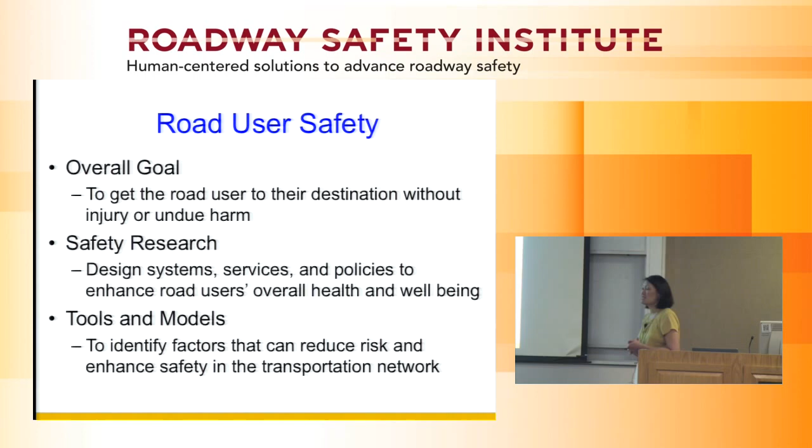To begin with, when I look at safety, I look at it from the road user perspective. My goal is to get the road user to their destination without any injury or undue harm. To do that, I basically look at designing systems, services, and policies that can help enhance the road user's overall health and well-being, using various tools and models to identify factors that can help reduce the risk and enhance the safety of everyone that uses the transportation network.

Primarily focusing on the behavior of the driver themselves, my goal is to make sure that we design systems that can actually take into account what's going on with the user. When we have these new systems coming on the road, and I talked a little bit about that yesterday, we're looking at systems that actually have the capability now to adapt to the user as the user is trying to adapt to it.

There's a lot of things that can actually come into play when we do that, which is the roadway, the topography, as well as the geography from the infrastructure perspective. But from the user side, there is how much experience we have with a particular road, as well as how much familiarity. So we need to basically account for what these individual driver differences are.

There are many things that are associated with the driver, including medical and cognitive impairments. We look at things like the onset of sleep apnea or the onset of dementia, things associated with older and younger drivers. There could be things related to fatigue, distraction, inattention, and generally this propensity to take risks that many of us think about.

Every time we get to an intersection or use a particular road, we actually weigh the risks about using certain aspects of it, whether or not we should stop, whether or not we should text while we're driving, whether or not we should proceed through any particular intersection. So when we're considering these systems and accounting for these individual differences, we also have to adjust for the fact that we're maybe driving a vehicle that has different types of devices, the traffic devices themselves, as well as the environment.

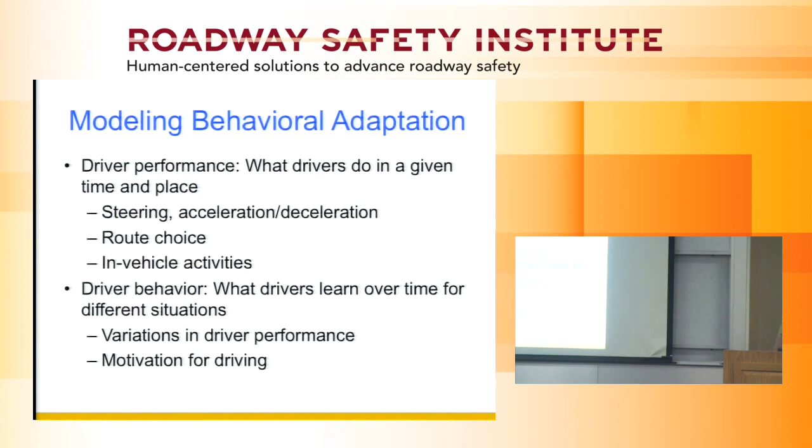So when we look at behavior adaptation, there's two kinds of aspects. There's the way a driver actually performs for a particular time and place, including how they steer, accelerate, decelerate, brake, park, what route choices they use, and what in-vehicle activities they do at a particular time. However, when we're looking at a pattern of behavior, we need to look at that over time.

We need to look at, are they going to be driving, let's say, 65 miles per hour on average on this particular roadway? Will they drive 65 miles per hour tomorrow, the next day, or the day after? So we're looking at these variations in driving performance and trying to understand how those variations and their motivations for driving can impact how they use these different systems.

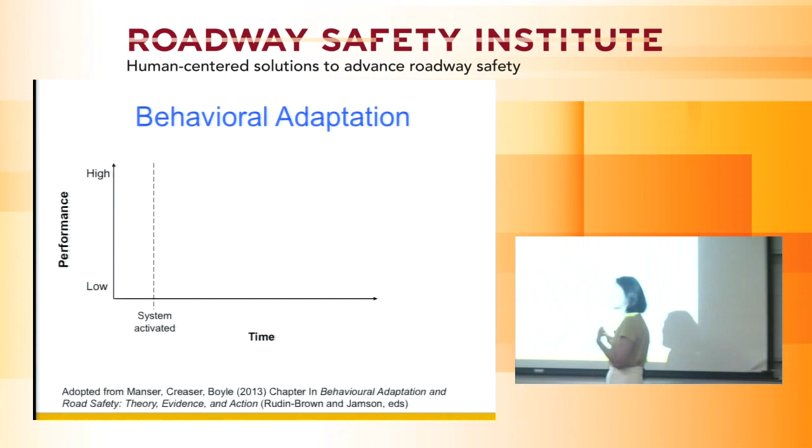So there was a model I worked on with a couple people here at the University of Minnesota a few years ago, Mike Manser and Janet Creaser, where we looked at how people actually change their behavior based on system use. The first thing is when you get a system in your car, it gets activated. Once that happens, we assume that if it's a safety system, your performance will actually increase based on that system. Let's say ABS, conventional cruise control—you expect your performance will get better.

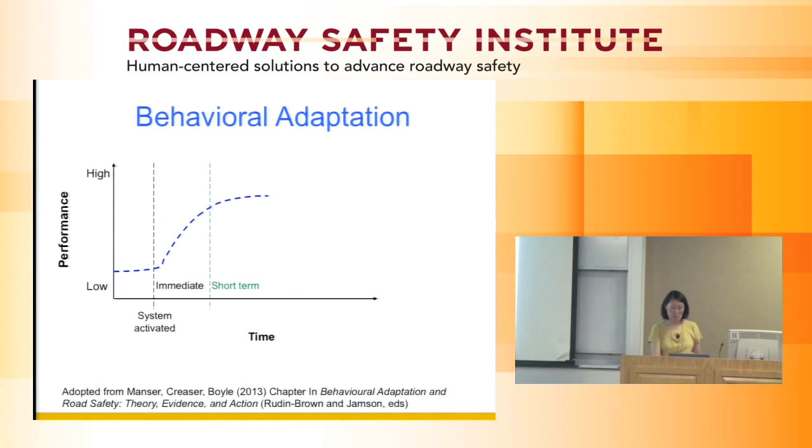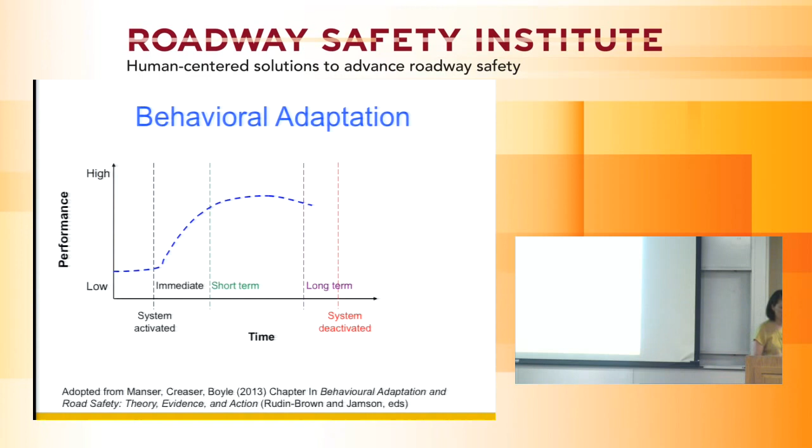Now, in the short term, you might even keep trying to improve and get even better. But over the long term, there's only so much you can do, and so you level off. If anything, you may not be able to perform at some maximum level, so it starts to go down a little bit. And if the system gets deactivated for any reason—whether you're using a different car or the system isn't working as expected so you turn it off—your performance might actually go down.

But the goal is the safety system is doing what we expect it to do. We actually hope to have some sort of positive transfer—in other words, what we learned from using that system will remain with us, such that our performance will hopefully be better than it was before, even when that system is no longer there.

However, the more likely case is that when that system is gone, I'm just going to go back to what my performance was and drive the way I normally do. Now, alternatively, the flip side is I got so used to that system that I was expecting it to do a whole bunch of stuff for me, so that when the system is no longer there, I become less aware, less knowledgeable about what to do in a particular situation. In that case, I might actually have a negative transfer.

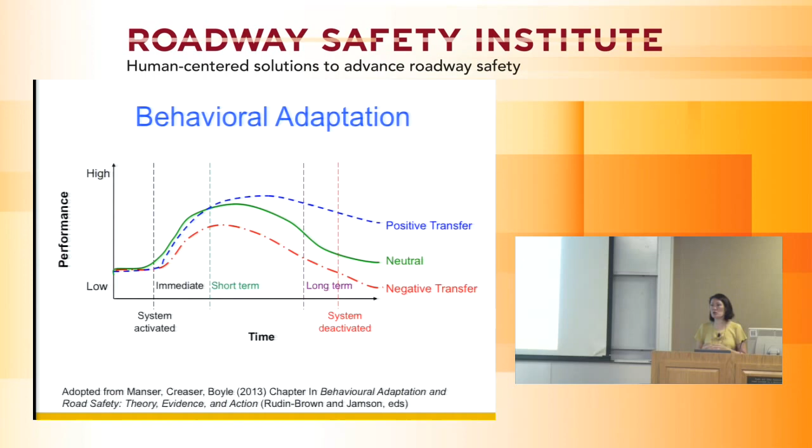So these are the three different possible scenarios, and there are different continuums in terms of how people adapt to different technologies. Now, when we look at that, there are different ways we can actually quantify that behavior. If we're trying to model how people behave in different situations, we can start by looking at their immediate response to a particular system. By doing that, we're looking at what their actual risks are as they're using that system in a particular environment, given whatever the risks are at that moment in time.

So how would you do that? We can actually use things like naturalistic data. We can look at the crashes that have occurred in the past and try to take a look at what's going on. Maybe the crashes only tell us one part, but we can look at those crashes in addition to moving violations—in other words, we can look at just observationally what has been going on with that particular driver.

So if we want to use naturalistic data—in other words, setting up a video system in a person's car or just observing them through whatever means—we can do that in different ways, but the value is that we can capture what these driver-initiated activities are. Why is it that they might use a system one way for one scenario but not in another? So it can provide insights into driver behavior for different types of environments and help us identify the context associated with those safety-critical events.

Now, of course, the challenge is it's hard to always see what these interactions are with new systems, because oftentimes it's not actually to the same degree. But we can maybe have more focused studies looking at these things.

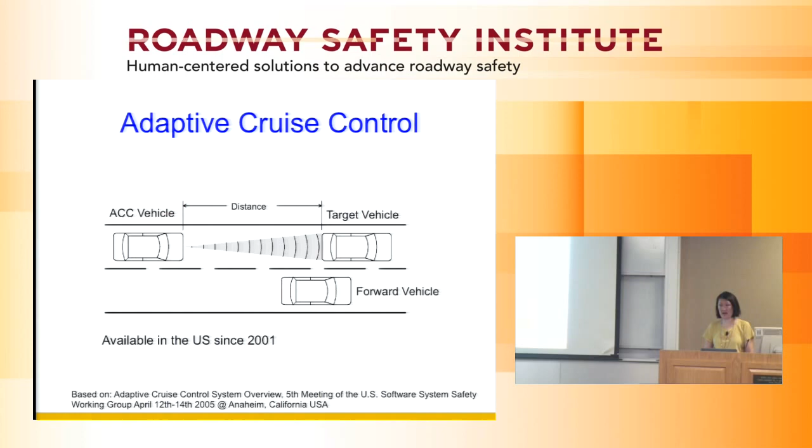This system has actually been around since 2001, so a lot of people have it in their car and may not be aware of it. There was a field operational test done at the University of Michigan Transportation Research Institute on intelligent cruise control, which was a precursor to adaptive cruise control. It was designed to work exactly the same way. This was done in 2003 to 2004.

What was really nice about the study is that they had 60-some odd vehicles, and all of these people had never used adaptive cruise control before, so we could see what their novice behavior is. We were able to look at these drivers in real-world situations using adaptive cruise control, and we examined their trajectory as they closed in on a lead vehicle.

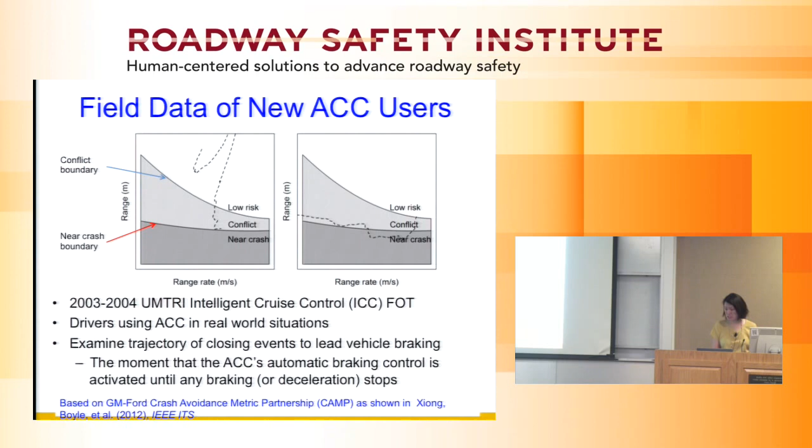However, what you might see a little bit differently is what happens next, which is that the driver may respond a little bit differently. In a conflict event, they respond much quicker. But in a near crash event, you can see that the lead vehicle starts slowing down a lot more, so they get closer and closer to the test vehicle, but the driver actually took longer to respond. So in near crash events, which are much more safety critical, it may take longer for the driver to respond, and if the ACC does not intervene appropriately, you could have a very serious situation.

As a matter of fact, when we looked at the response time to these conflict events for these different scenarios, where there's a near crash where the ACC basically responds, and a near crash where the ACC responds and the driver intervenes, etc., we actually see these different types of patterns.

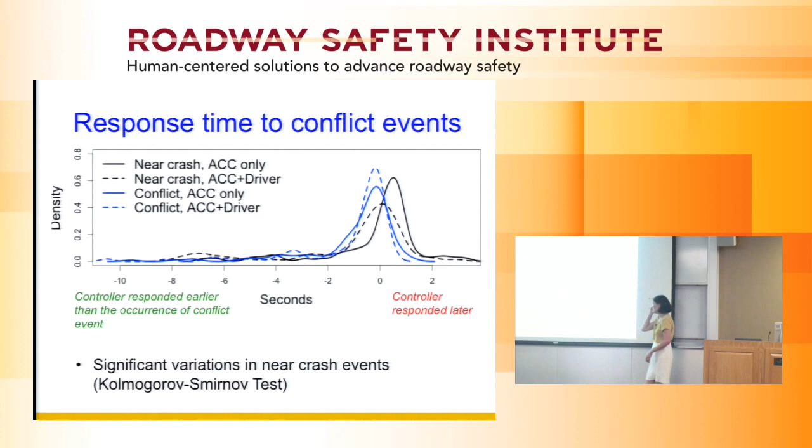So these are situations that we wanted to take a look at in greater detail. We used this data: there were 66 participants, equal numbers of males and females, and 3 age groups—younger, middle-aged, and older. And we set up a logit model with repeated measures because there are multiple observations per participant.

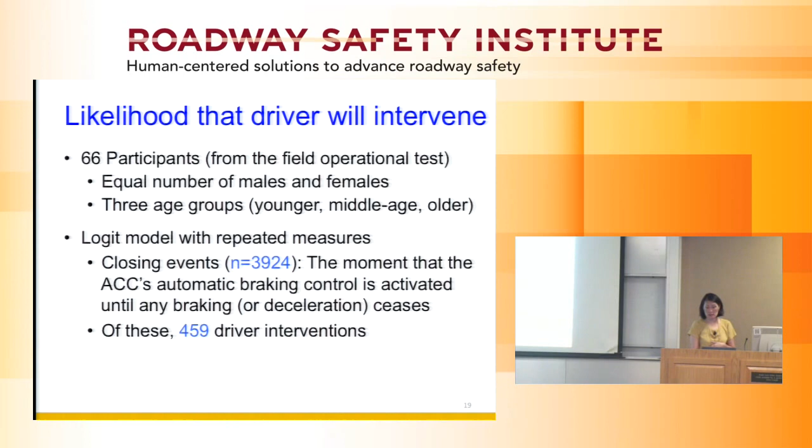There were almost 4,000 closing events, with 459 of them where the driver actually intervened—in other words, the driver took over for whatever reason. So we set up a logit model to take a look at what is the likelihood that the driver is going to intervene in this situation, given the fact that there is an adaptive cruise control system.

So after this model, the way to interpret this graph is that they're less likely to intervene if they're on the left side of one, and more likely to intervene on this side. So what this graph says is that on the highway, they're actually less likely to intervene. And that makes sense because on the highway they feel more comfortable with the car in front, and the ACC should be able to take over for most situations.

Whereas if they're younger, they're also less likely to intervene. If they're older or middle-aged, they're more likely to intervene. In other words, if you're an older or middle-aged individual compared to a younger driver, you're more likely to press on the brake and less likely to let ACC take over.

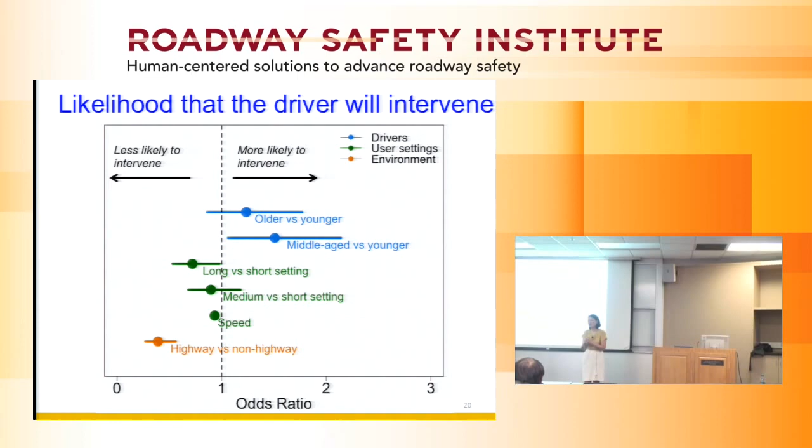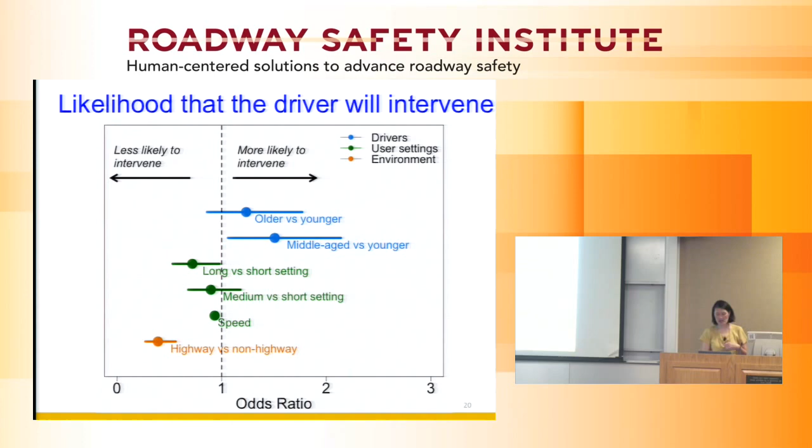And what these green dots are is how you set the gap setting. On this particular vehicle you can set it very close, somewhere in the middle, or a bit further away. So this is saying that if you set it on the very long setting, you're less likely to intervene—you feel more comfortable letting ACC intervene because you've allowed enough room for that to happen. It's interesting because you get this kind of information using naturalistic data, seeing what situations the driver is most likely to intervene in and what's going on.

But you can't really see exactly what the specific situations are or why these particular drivers are doing what they're doing. The challenge of naturalistic data is that we can parse out these differences, but there's lots of variation. Every single situation has some other scenario with different people, different vehicles, different road configurations, different weather conditions, and some of those measurements may not be as good.

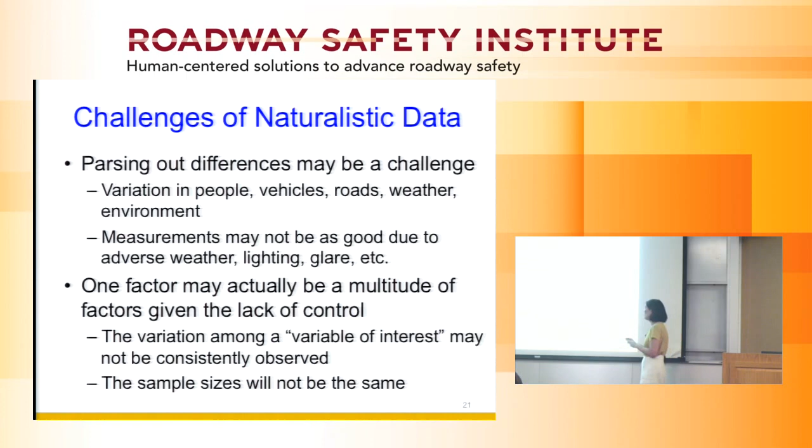This naturalistic data collection system was from 2003 to 2004, so some measurements may not be good due to adverse weather conditions, lighting, or glare. And even though we're looking at one factor in a naturalistic study, it could actually be a multitude of other factors. So the variation you see in some variable of interest may not be consistently observed, and of course the sample sizes are definitely not going to be the same.

So just to give an example, let's say I'm interested in the impact of driver distraction on crash risk. Well, driver distraction—if I wanted a code that said driver distraction yes or no—that's actually dependent on many different things. What is the type of distraction? The type of mobile device, if the distraction happens to be a mobile device. Where is the location of the device while I'm driving? Because that might have an impact, as well as how I'm interacting with the device and what are the circumstances associated with it.

So why this is important is because when you look at studies that come from naturalistic data and simulator studies, you might actually see different results. And one of the reasons why is because of how it is that you're looking at this data.

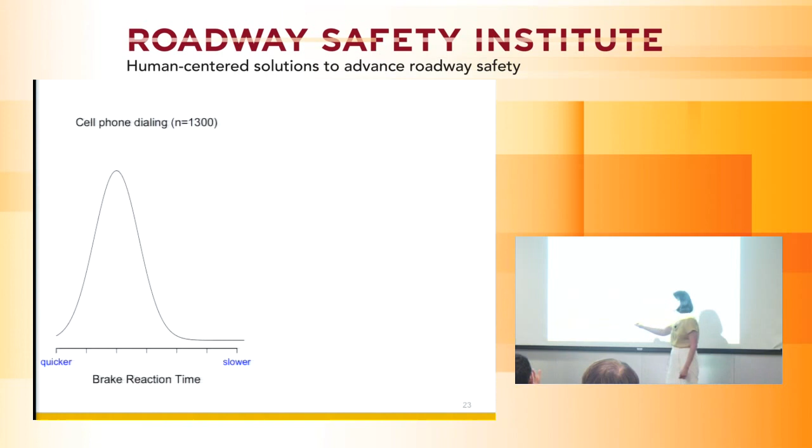For example, let's say I'm looking at cell phone dialing. If I do a naturalistic data study, I might actually see that the distribution is skewed more toward one side, which might suggest that you have quicker response time when using a cell phone. That's amazing, but at the same time, we do see some protective effects associated with cell phone use.

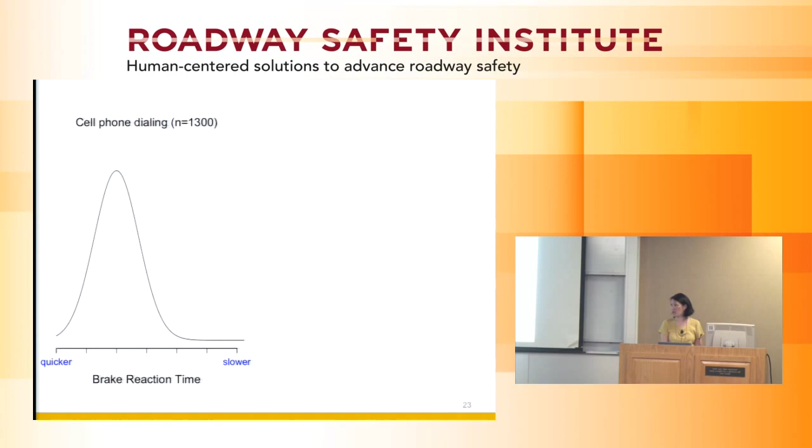But what if it is the case that cell phone dialing is associated with three different types of dialing? Let's say one is touch screen dialing, handheld voice dialing, and Bluetooth dialing. Because there are a lot of laws on the road about not being supposed to use handheld, you wouldn't really see that many observations of one compared to the other. So with Bluetooth dialing, which has 900 observations, that may actually skew the distribution more toward one side compared to the other.

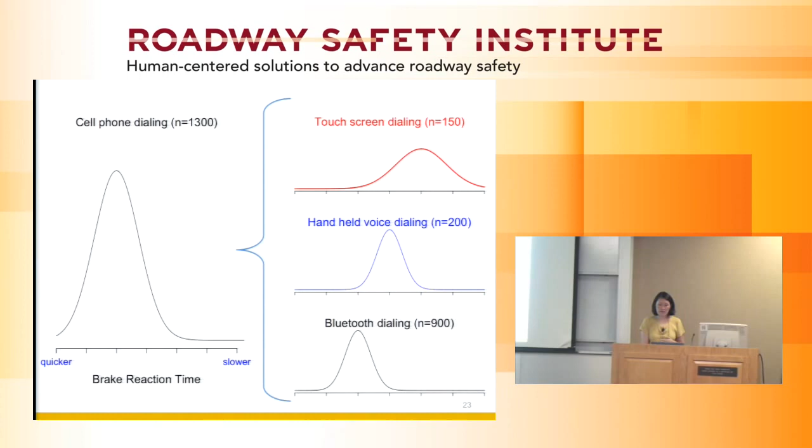If you were to look at these in more detail, let's say we look at touch screen dialing and Bluetooth dialing, where somebody might still have a flip phone where they're just pressing buttons, or they're using Bluetooth, we may see that for touchscreen dialing there were 75 participants in this category, and there was only like 1 to 3 observations. In other words, only half of the sample was unique.

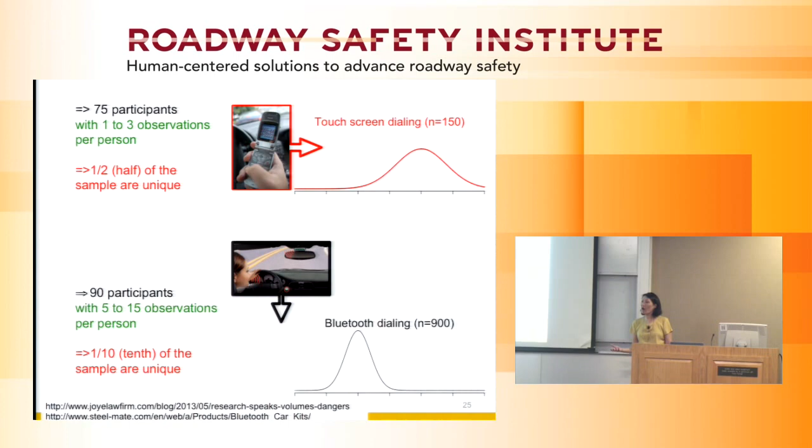However, in the Bluetooth category it may not be that much more — it was like 90 participants, and because they used Bluetooth quite often, there might be 5 to 15 observations associated with that. So only one tenth of the sample is actually unique.

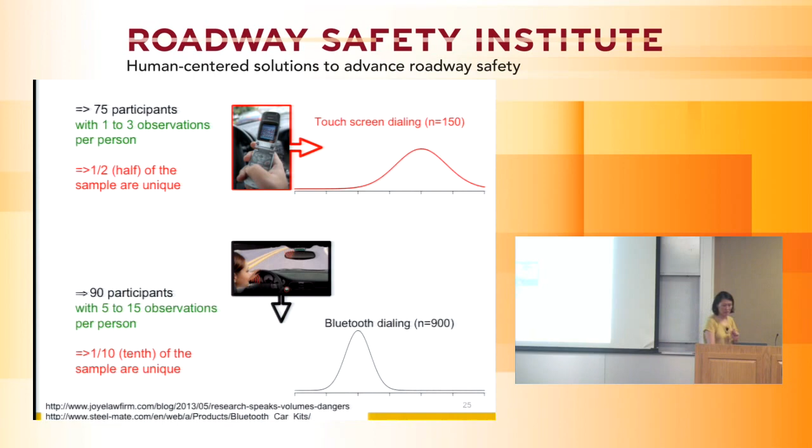So these are things that have to be taken into account when you're analyzing this type of data, and that's really important. So when we think about what repeated measures are, which is what we do when looking at some of these studies, going back to the logit model with repeated measures, we have to take into account how these observations and how the differences are actually correlated.

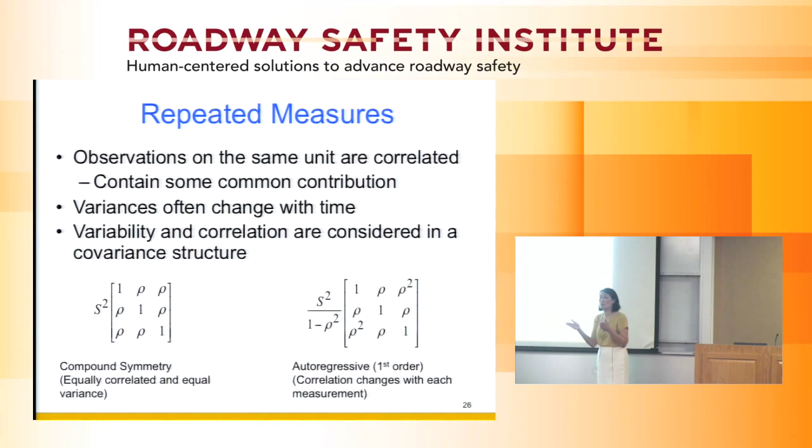There are going to be different types of variations associated with changes in time, and we have to consider what that covariance matrix is. I'm not expecting you to memorize this, and these aren't the only two types of covariance matrix, but my point is to show you that there are differences in how the relationship between different points in time are linked together, and that has to be somehow accounted for when you're doing your analysis.

The other thing that's important to recognize is that when you're looking at these different variations and covariance structures, there are different types of repeated measures. Participants could be observed over different types of conditions, like weather, different roads, different days, and you want to be able to capture that. If we're looking at days, there could be different types of measurements in time that are more equally spaced — maybe every second, every hour, every week, every month — and you want to be able to account for that.

And that is very different from just looking at a before and after study. So depending on what it is that you're trying to answer and what your research question is, you might want to take that into consideration.

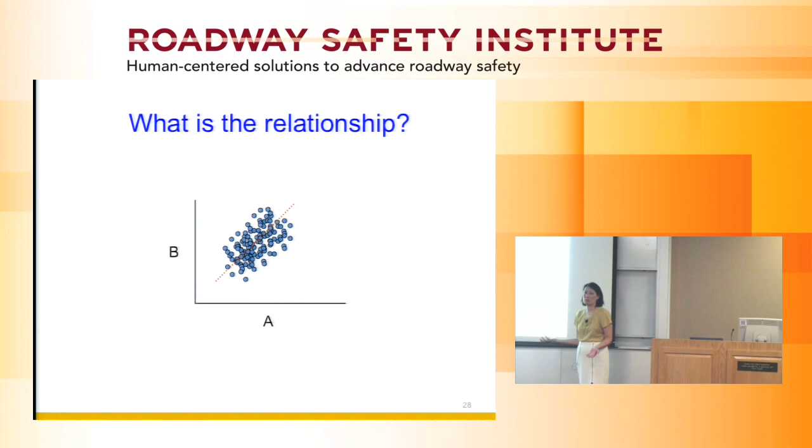So what you thought was A being positively related to B might have actually been completely the opposite. If you don't take into account that within-subject variation associated with the participants you're looking at in terms of data, your outcomes may actually be different from what they should be.

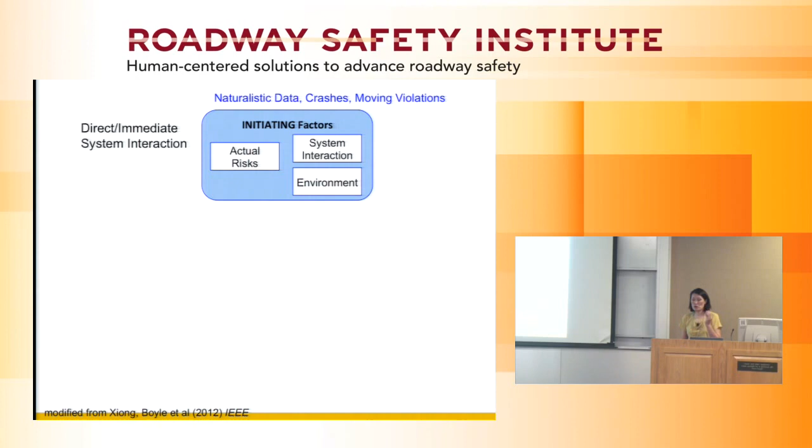Going back to this graph where we can try to capture what the actual risks are, at the same time there are other motivations that can be driving the user, which is the long-term exposure. I may have used this route many, many times, and so I have a perception of what the risks are associated with that intersection.

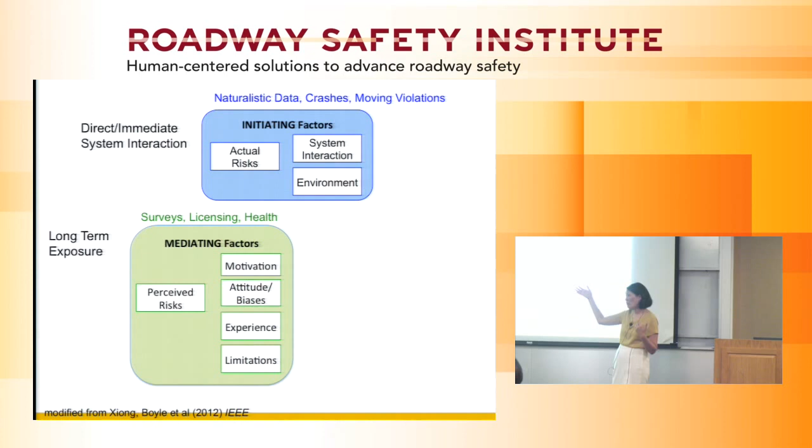I have a perception about how many pedestrians or bicyclists I see, and so I may be willing to take more risk, or I may also know exactly what the timing is of that traffic signal, so I'll be willing to take risk for a different reason.

So there are different types of motivations, attitudes, biases, and experiences that all have to be accounted for when we're thinking about looking at these different systems.

For example, going back to adaptive cruise control, there are actually many differences across these systems between makes and models, between the number of gap settings, the types of gap settings, how long the gap settings are, the different types of displays I see with adaptive cruise control, and what types of configurations and capabilities they have.

Many of the earlier adaptive cruise controls actually had a lot of problems being used in stop-and-go traffic. If there was a vehicle stopped in front, it could not detect it, because it was based on an algorithm built for two moving vehicles. It also could not handle roads where the curvature was too large, because it's based on a radar in front that has a certain field of view. If you're on a curvy road that surpasses that field of view, you're not going to be able to use it appropriately.

This system has been around since 2001. What we did is we did a survey in Washington State where we sent it out to people who potentially had adaptive cruise control as part of the vehicle they purchased. And we asked them this question: can ACC actually help you in stop-and-go traffic on curvy roads and for stopped vehicles?

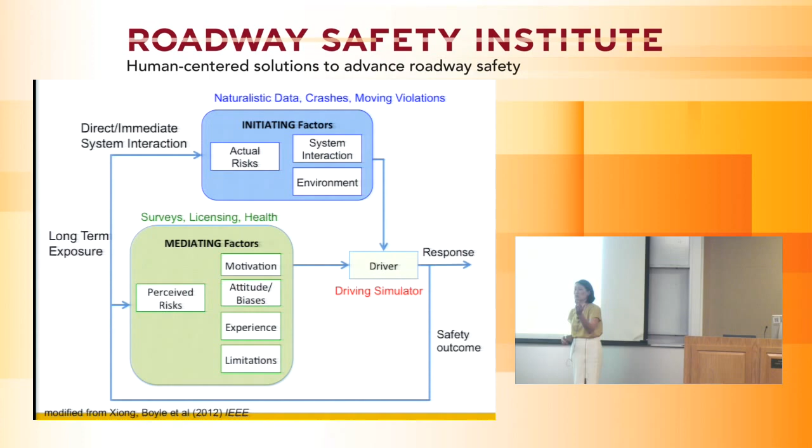And that's where a driving simulator could be very, very useful, because you can use a driving simulator to repeat and look at things over and over again to see what kind of outcomes there could be in certain situations. So observational studies and naturalistic data can show you what particular situations you want to be able to simulate. You can understand what the limitations are and then test for it in some ways.

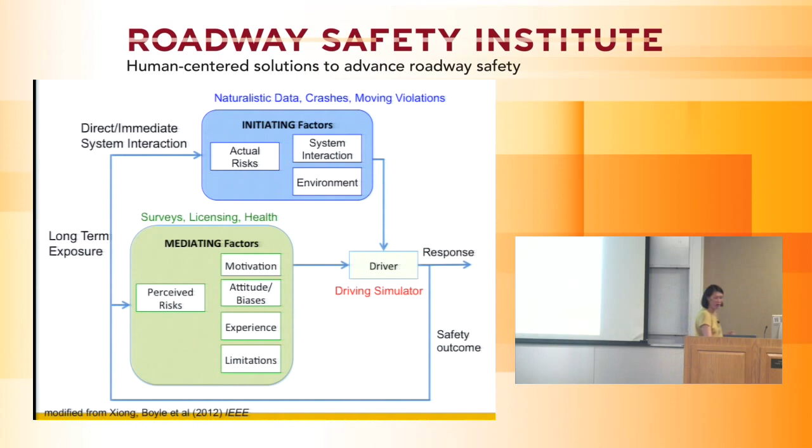This is before you actually deploy it. It can help guide the design of advanced driver support systems even before they're on the road, because that's the other valuable thing about driving simulators. You can use them to look at systems that are not actually deployed yet, and you can look at different types of road configurations before your state agency actually puts it on the road and spends a lot of money on it.

And you can also use it to identify the magnitude of the effect of that particular performance. So it's nice because you can have repeatable outcomes, and if you design your study correctly, you can get very, very close to equal sample sizes for each of the conditions you're interested in testing.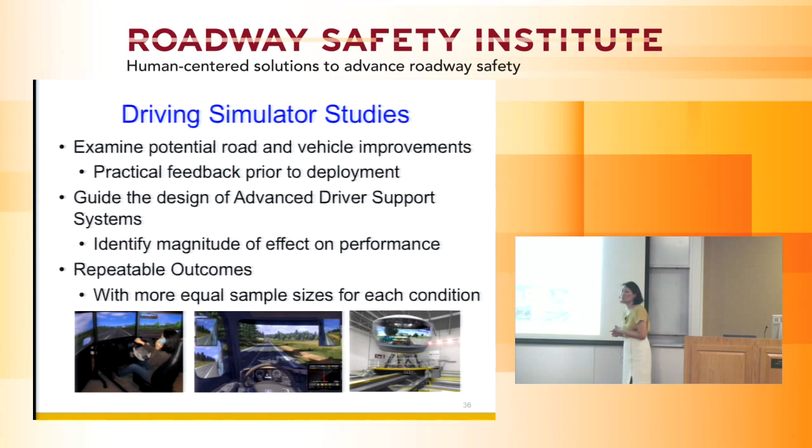So we actually did that with adaptive cruise control. We looked at different patterns of adaptive cruise control, and we brought in people who actually use the system. Not just novice drivers, but people who had been using the system for at least one year for a certain amount of miles, and we wanted to see how well they would be using it.

So if you remember what I said earlier, every single adaptive cruise control system is a little bit different. So we actually just focused on one group of users. At the time that we did the study, when we did the surveys to figure out the most likely type of car, most people owned either a Toyota or a Lexus that had adaptive cruise control.

Toyota and Lexus is the same parent company, so their system is almost identical, if not identical. We used the University of Iowa driving simulator because it was motion-based, and we wanted to look at different types of scenarios. We set it up so we actually had the steering wheel with the exact same types of controls.

They can go ahead and set the gap setting the way they want, as well as what the posted speed and the speed is. They had a display so they could actually see what types of settings they had. This was exactly the same system that Toyota had in their car at that time.

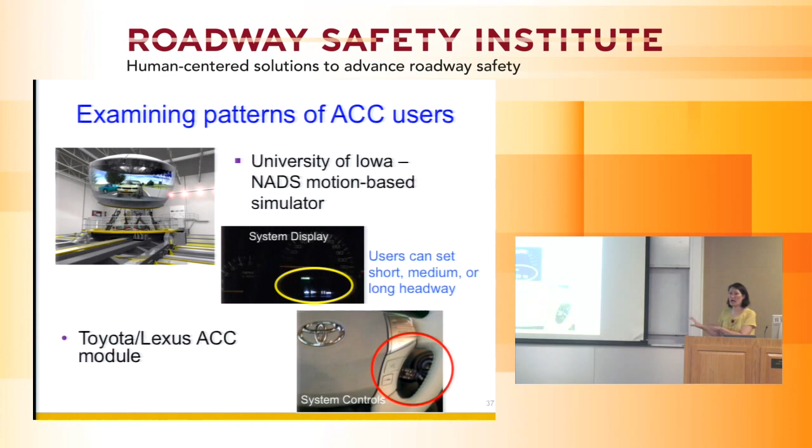So we collected 24 drivers. They were experienced Toyota and Lexus ACC owners, and their mean age was 56. People always ask me, why didn't you look at younger people? One of the criteria for participating in the study was that they had to have owned these Toyota or Lexus vehicles, and the majority of people that owned these higher-end vehicles were older. Not a lot of students owned these types of vehicles at that time.

So we collected information. We had them drive through several different routes, and we observed how many times they engaged their ACC, disengaged their ACC, the number of times ACC issued a warning, and the percent of time they set it at different settings.

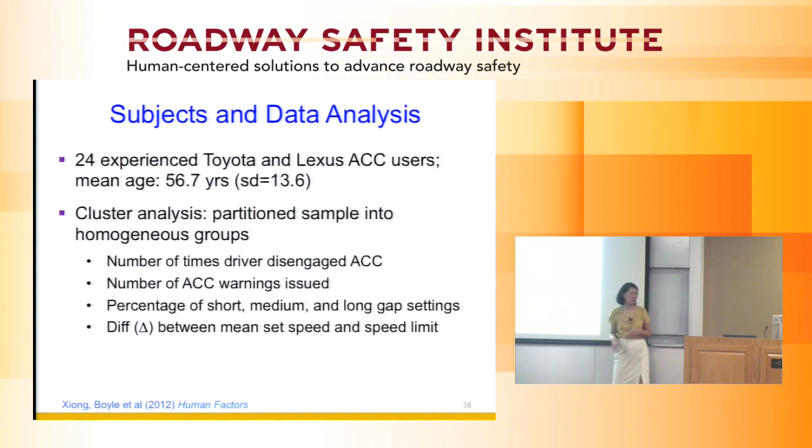Whereas the group on the bottom, we consider to be more risky. They disengaged the ACC less - in other words, they let ACC go ahead and turn on and slow them down, and they were approximately above the posted speed limits by just a little bit. So when we looked at these categories, we put them into cluster groups: the conservative group, a moderately risky group, and a risky group.

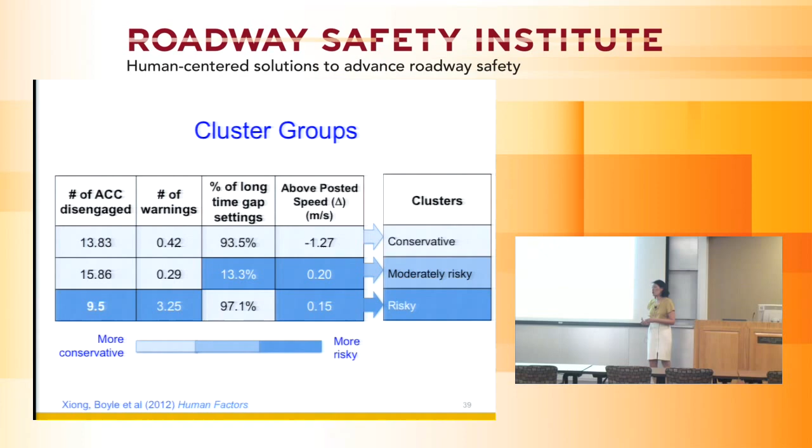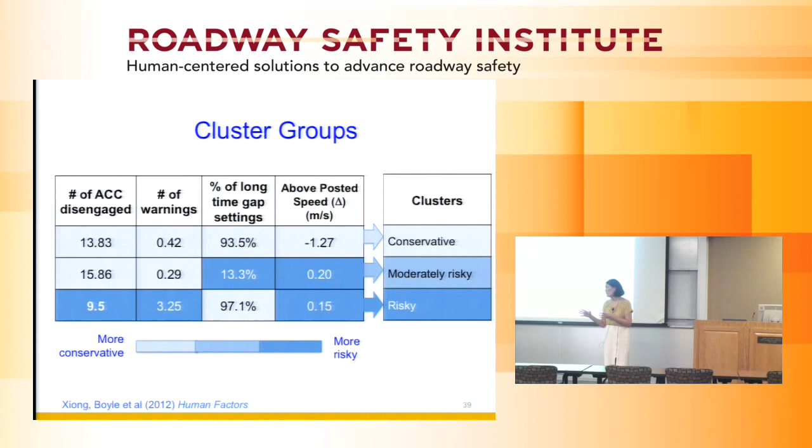So why this is interesting is here it is - there's a group of drivers, pretty homogeneous in terms of their age range, in the middle age range, but yet they use ACC very, very differently, and all of them have the same type of ACC.

So we then asked them some questions about what their trust was in the adaptive cruise control. We did this on a 5-point scale, with 12 different questions. I'm just going to show a couple here. And then we also asked some questions on driving styles.

The trust questions were: do you have some overall trust in your adaptive cruise control? Do you trust that the adaptive cruise control is displaying the information correctly? Do you trust that the adaptive cruise control is in cooperation with you? And several others.

For the driving style questions, we wanted to get a sense of who these drivers were. Do they tend to drive fast? Do they tend to plan trips in advance? Do they tend to ignore distractions?

So when we went back to these three groups of people - the conservative drivers, the moderately risky, and the risky - we see that the conservative drivers had about an appropriate level of trust. They had a high level of trust, but it was appropriate for what they were using the ACC for. They actually noted that they had a very cautious driving style, which matched how they drove, like putting their posted speed a little bit lower than what it is.

Moderately risky drivers had the lowest level of trust in the ACC, and they were actually more confident in their own driving skills, and they tend to drive faster.

The risky drivers said ACC is great for everything - they basically tend to overtrust ACC, and they were not aware of the system limitations. So the questions we asked, like whether your ACC system is going to work in stop-and-go traffic or on curvy roads, they said yes, yes, yes, it's going to work for everything. These people also tend to be the most easily distracted.

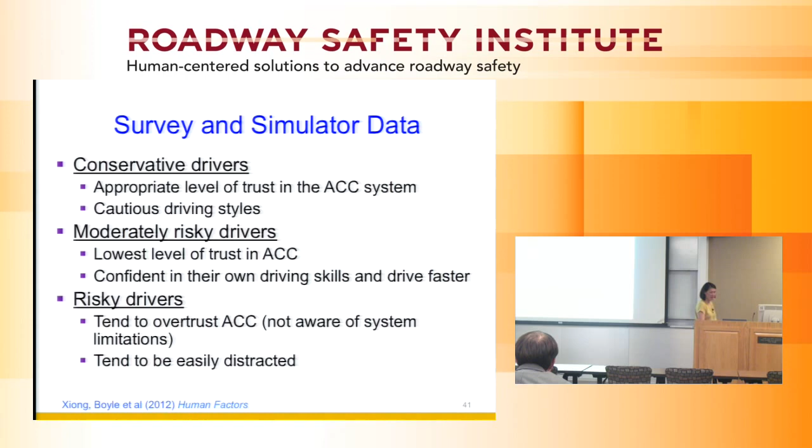They tend to be very easily distracted, and they're the ones using the system perhaps not in the way it was designed for by the manufacturer. So it's interesting because we're looking at these types of systems.

Many of these systems that car manufacturers put in are marketed as convenience systems, but many people view them as safety systems, even though they're not marketed as such, because one of the questions we ask is, do you view this as a safety system?

So is that true for many other things we do in the car? We did another study looking at in-vehicle information systems, just doing texting or reading in the car. We wanted to see whether people adapted to their in-vehicle system over time, some positively, some negatively.

Positive adaptation could mean the driver decreases their eyes-off-road time and spends more time looking at the road. Negative adaptation means they spend more time looking at the system because they think they can maintain the road condition better.

We did this study with 28 drivers, having them engage in different tasks from text entry to text reading of varying lengths. We varied the number of characters in each task.

We had text entry tasks like typing a short word such as 'blue,' B-L-U-E, or a much bigger word like 'elephant.' So we had text entry tasks with a small, medium, and large number of characters to type in.

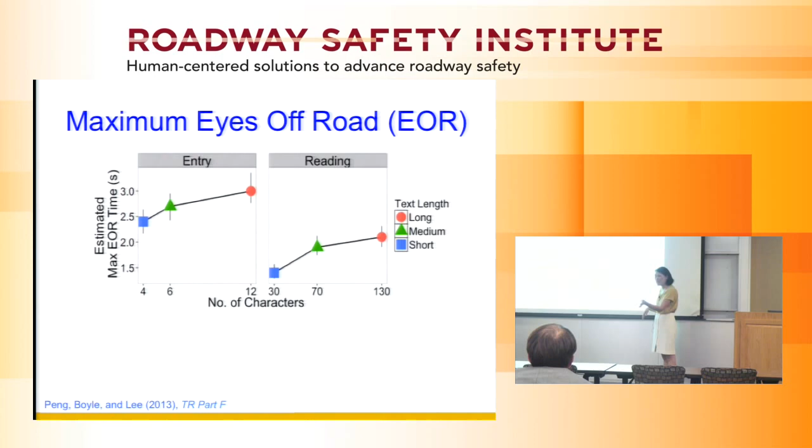We also had a reading task, like reading a variable message sign: 'snowplow ahead,' maybe 30 characters. It could be longer, like 'snowplow ahead, move over to the right-hand lane,' around 70 characters, or even longer with additional explanation.

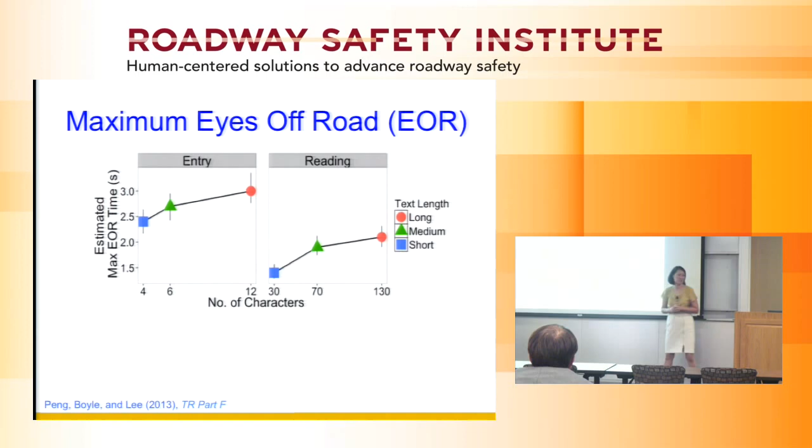We basically looked at increases across different character counts. You can see by the eyes-off-road time—this is their maximum eyes-off-road time during these tasks—that it does increase with more characters.

What's interesting is that in many of the studies we look at, if your eyes are off the road for more than 2 seconds, you're more likely to be involved in a crash. If you look at this graph at the 2-second mark, even entering 4 characters could be problematic, since it can go up to about 2.5 seconds.

But it's interesting because it's not a straight line—it's not quite linear. So it's just something to think about.

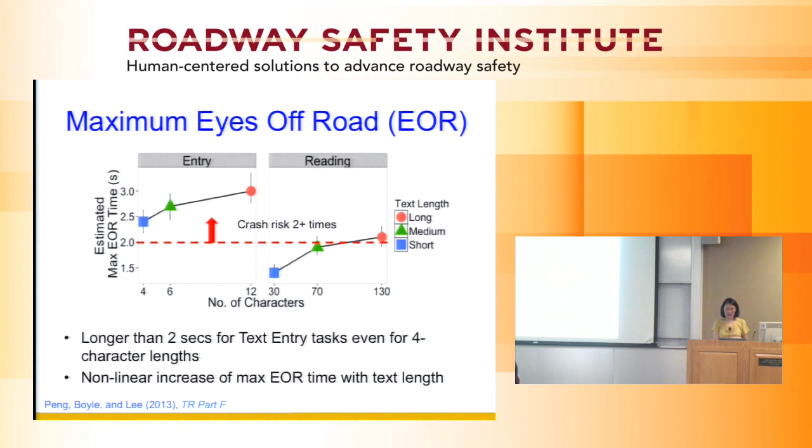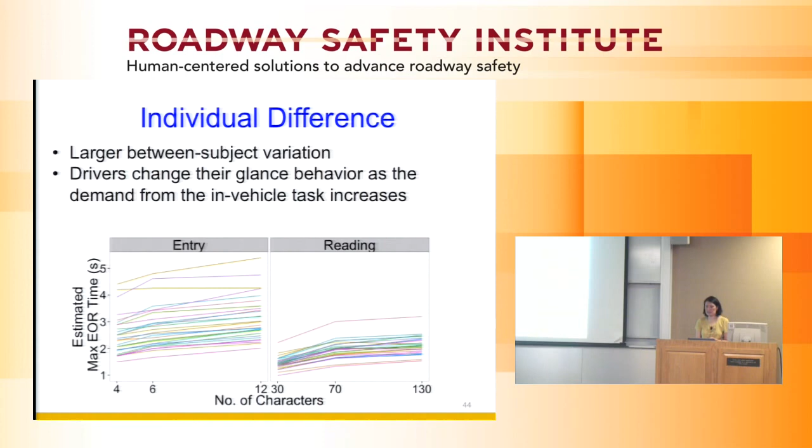We also looked at this data over multiple days—we tested it for one day, then brought participants back for another day and another to see if that would have an impact.

Looking at eyes-off-road time, with the text entry task, from day 1 to day 3 they actually increased the amount of time they looked at the in-vehicle task. With the reading task it stayed about the same, increasing only slightly, not as much as the text entry tasks.

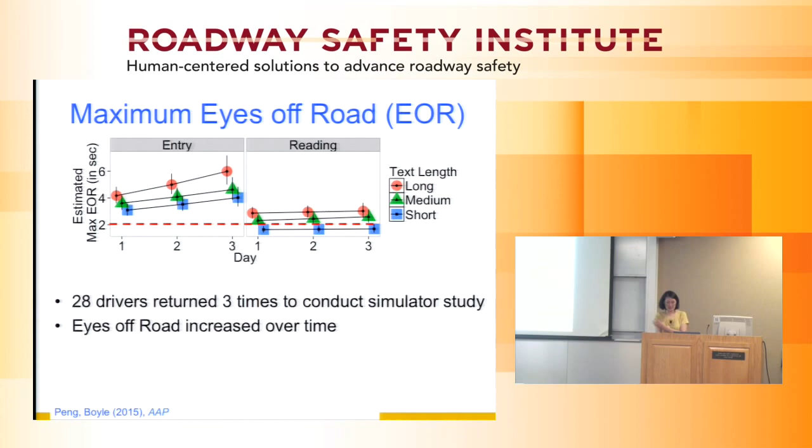So we had these people come back, and that's what we observed. However, what's very interesting is that even with more eyes-off-road time, referencing the 2-second rule again, you'll see where that threshold falls.

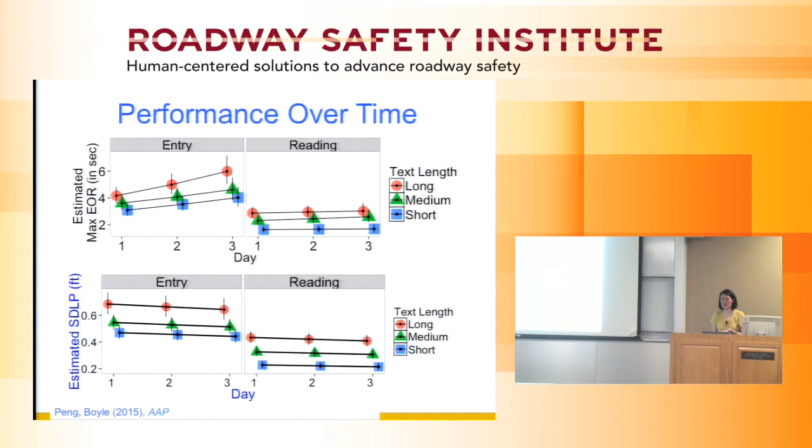Why this is interesting, and you could say scary, is that people start getting more and more confident that they're doing things the right way. But if something just comes darting out, you may not be able to respond as well because you're not looking at the road as much as you were in the beginning of using this device. So something to think about when you're driving and you think you're very confident texting your loved one on their phone after several times.

Now, of course, these last two studies I showed were in a simulator, and one challenge people always mention is that this is not the real world. So whenever I write papers on this, I have to have a limitation section that identifies what those limitations are. But that being said, if you want to see a scenario over and over and understand what would happen and what the magnitude of the change is, a simulator is great for doing that.

Now, of course, you can't really control for everything in a simulator. There are some things you need to vary, and you also want to be able to see some levels of varying traffic.

The other thing that has been a concern in simulator studies is the likelihood of simulator sickness. We had this older individual who was a fighter pilot in a previous life, and he hurled big time.

So these are things you don't really want to see in a simulator, but at the same time, you want to try to get a representative sample, while also recognizing there are biases associated with those who can actually participate in the driving simulator. And if I have repeated conditions within a participant, there are learning effects associated with it, and that has to also be taken into account.

But of course, there is value for both naturalistic and simulator studies. In naturalistic studies you can observe varying traffic and other types of road users, but in the simulator you can control for that, so both are of value to look at. Both can also be complemented with other types of data—you can use video data, eye tracking data, and we've used physiological measures like heart rate monitors and EEG to look at different things.

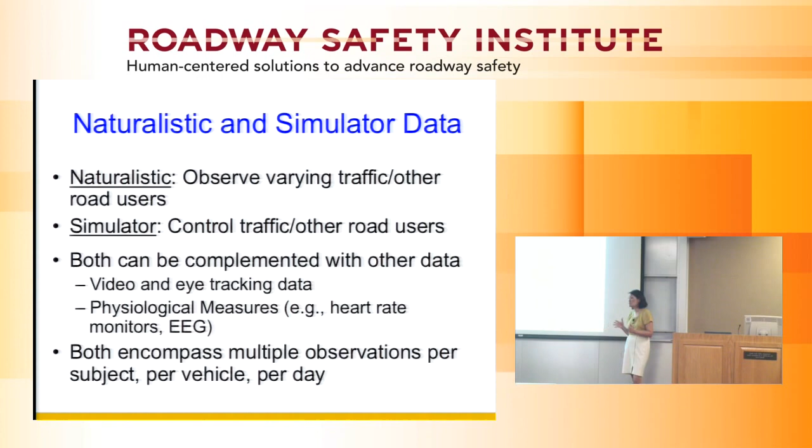Both encompass multiple observations per subject, per vehicle, per day. So just doing a simple t-test or pairwise comparison is really very difficult, because you want to be able to account for all these individual variations that I've brought up.

So I talked about just driving simulator and naturalistic studies, but there's actually a whole bunch of variations you can do when looking at modeling the effects of adaptive behaviors. You just have to recognize that depending on which way you go, you could get closer and closer to the real world, but you would have less experimental control.

My point is that there is value in doing all of these different studies, and I've actually had studies in almost every single one. The reason why is because sometimes you just want to see whether there's a difference in something very subtle, and other times you just want to understand what's going on in the real world. Somewhere in between will give you the complete answer. So you can't really just rely on one particular data collection tool to get insights on modeling behavior adaptation—you really do need a gamut of different techniques and understand how to bring them all together.

When I think about adaptation to technology, another area we're looking into is understanding how people use different technologies mounted in the car. But of course, we can also bring in technology ourselves. When we did a contextual interview looking at how people use voice interactions, we found that even people who have in-vehicle systems like Ford Sync will still supplement with another device. So people are often using a multitude of devices in the car, and if there's a combination of different things, how do people switch back and forth from one system to the next while driving?

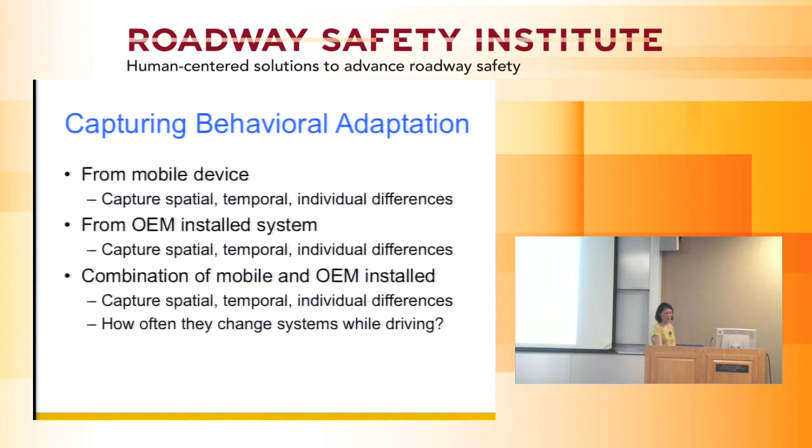One way you can do this is through Waze, which is basically a crowdsourcing system that in 2013 Forbes reported had 50 million users. With 50 million users, you have at least 50 million data points, so you can capture all these changes in behavior given different traffic conditions, soliciting that from a broader driving community. That said, there's a bias associated with this, as with many types of data collection, in terms of who's actually using Waze. Yes, there's 50 million people, but there's 150 million who are not using it. So what are some of the differences, and how do we capture those trends?

Understanding who the population is, as well as who the non-users are, and being able to compare that, is really important. So my parting words are that there's a lot of increase in technology, and there are all these different safety issues that will continually arise. But hopefully I gave you a flavor of all these different types of data sources you can get information from. They do not, in my mind, compete against each other at all — they're very complementary, and they answer many different types of research questions. We just have to identify what those differences are and how we use those tools together.

In general, to me, data-driven outcomes are so important. They're basically used, depending on the tool, to identify either the causality or the association. If you understand what those differences are, you can use it to validate your framework for your driver model. And understanding this triangulation of all these data sources is very important — if you understand that, you can get a very good picture of how people behave on the road.

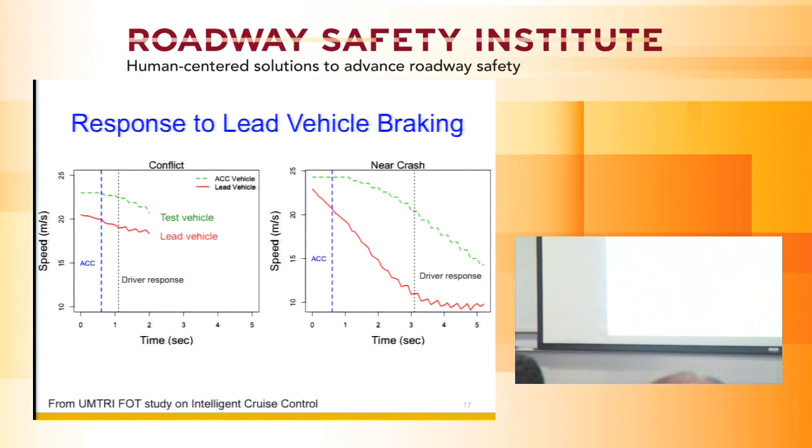So Gary had a question. Yeah, Linda, so in the first part of the talk, the question that was posed was: does adaptive cruise control help or hurt? And then you gave us some results from naturalistic driving, and some simulator results. So let's come back to that question. Does it help or hurt, or is it too soon to tell? It depends on what the situation is. In freeway driving, it can be very useful, but you still have to be aware. The issue is that because we're not at fully autonomous vehicles, we're at semi-autonomous, you as the driver are still the controller, still playing a major role, so you still have to be vigilant. As long as you're vigilant and recognize the limitations of your system, it could be helpful for various situations. But it depends.